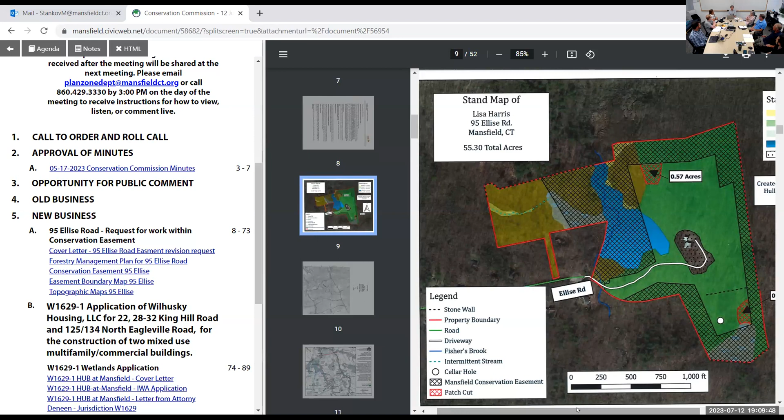And so I just want to be super clear that the easement is written in a way that explicitly allows this activity, because there are phrases in there which prohibit it. I'm all for the activity - it's the precedent on our conservation easements that I'm more concerned with. So I'm just going to pop out the easement in a new tab here.

The way the easement is written - now I'm not an attorney, but I have to preface that anytime I try to give any legal reading of anything - section 2 notes that the grantor covenants that without express written consent from the grantee, all of the following activities are prohibited, meaning no removal or destruction of trees of any kind or dead trees, no dumping, no topo changes, all of those things.

However, any request for written approval for uses and activities noted above shall be accompanied by a detailed statement of purpose and specific plans. And the grantee, the town, has the right to approve such changes in use, provided it is found they do not interfere with or have an adverse impact on the natural, scenic, ecological, and open space values being protected.

So you're absolutely right that there are laws that say you basically can't modify an easement in a way that would give someone a benefit if this provision doesn't exist, but fortunately this one was written with that language.

And so that written approval, as you said, just to confirm, is coming from Planning and Zoning? I believe it has to come from the town council. Some easements are written so that Planning and Zoning is the delegated authority, but I haven't found one here. I actually have a meeting with the town attorney tomorrow, and that's on my agenda - whether it's part of the delegated powers of PZC - but I think it has to be the town council.

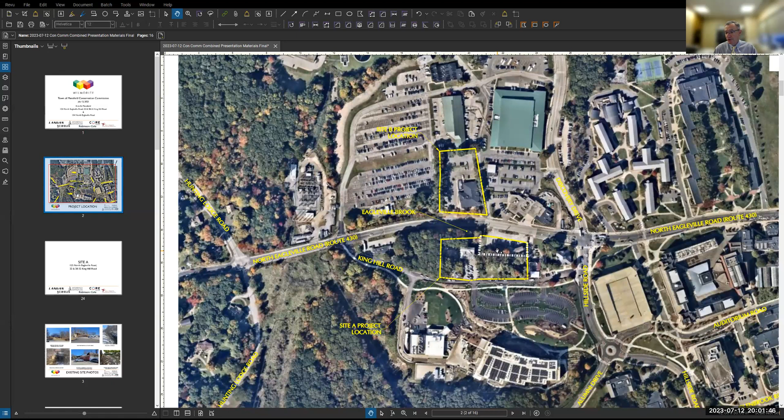With that, I'll pause and say that our presentation this evening will include a few slides. Tim Underko is going to run the presentation. He'll give you an overview of this revised project and some of the key details that relate to the regulated areas on the property. There are no wetlands or watercourses on the property. There is some off-site activity which brings the upland review area on the project site into question, and we'll look at that. Then Dean Gustafson will review the resources primarily associated with Eagleville Brook and describe some of the mitigation plans we've developed for the project.

Great, thanks, Tom. Michael, you did see Tim O'Neill on the Zoom earlier. He is attempting to fly out of Chicago, but a tornado has touched down in Chicago. So they are sheltering in the basement of O'Hare Airport as the tornado moves through the city. He sent me a message that he had to drop off, but he was going to try and listen in. So he's dealing with some things right now.

So I'll take the slides from him on this one. But Tim did present in January. I think Tom did a great job of highlighting some of the differences that we'll run through. Again, my name is Tim Underko, professional engineer and a principal with Langan, with our offices in New Haven.

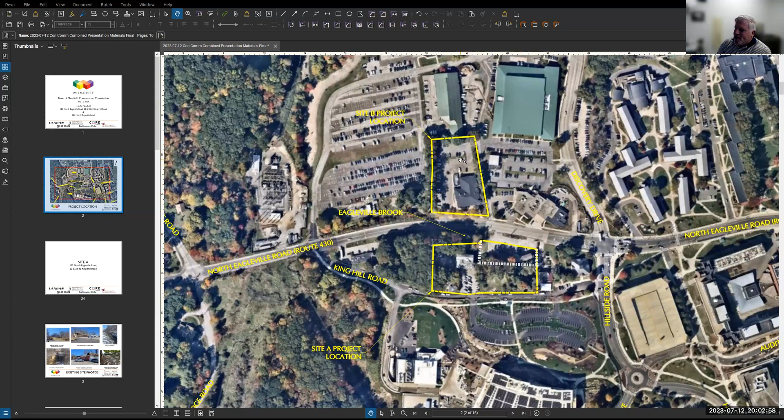So we're going to split the slides up into two divisions here. Site A is the site south of North Eagleville between King Hill Road, and includes the new parcel here that is the Sam's Food and Subway. And then site B is the current location of Huskies on the north side of North Eagleville Road. I'm going to try and go quickly through most of site A since we've talked about a lot of this previously.

Some site photos, so you can see the existing buildings that occupy the site. And then really the most important resource is the section of Eagleville Brook that's on the north side of the property, off of the private land located within the North Eagleville right-of-way, call it the state of Connecticut / UConn ownership. Here is the existing culverts that we spent some time discussing in January, where the previous application included an extension of these culverts so that there was the ability for the driveway to cross over from the property out to North Eagleville.

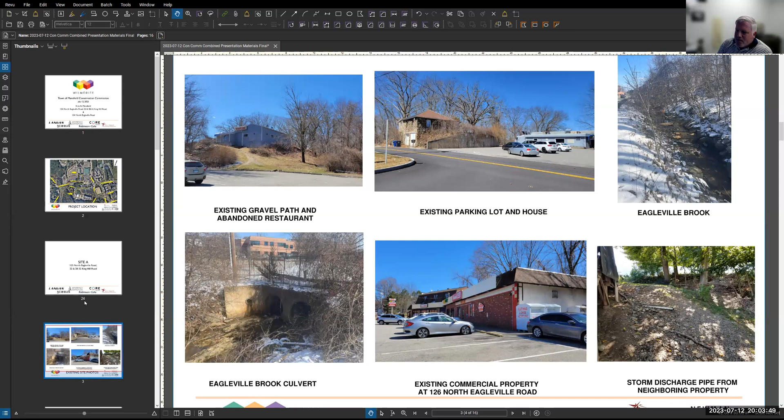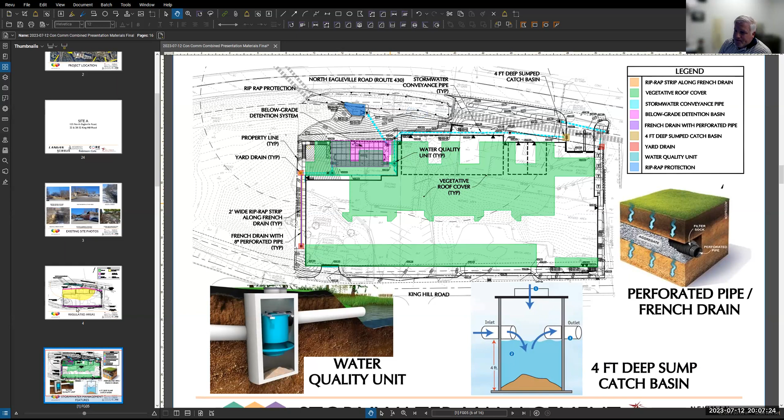I think that might be a good spot. Dean, anything you'd want to add from either a resource standpoint or from the enhancement to this area? Actually, before you start—

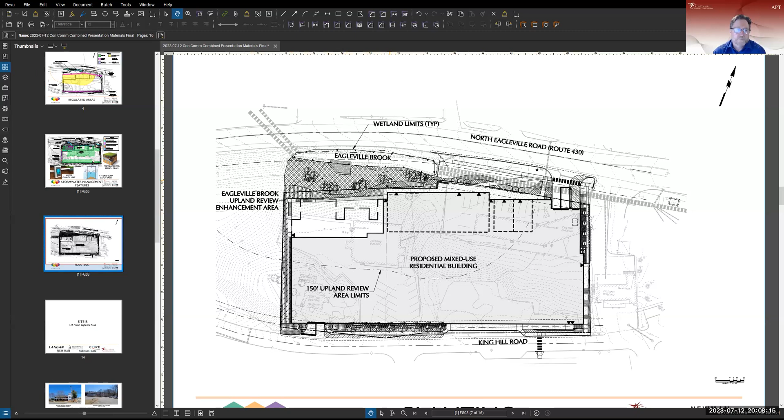Tom mentioned it but didn't show it. In the January application, if you recall, the driveway for the project was generally in this area here, and doing so required us to extend the culverts to shorten the length of the open water stretch of Eagleville Brook. With the addition of the Sam's Food and Subway parcel, we're able to move that driveway all the way to the eastern end and not have that direct impact to the brook itself. We don't need to modify the existing head wall or the existing culvert. So I thought that was worth mentioning—I know Tom brought it up, but wanted to highlight it with the graphic.

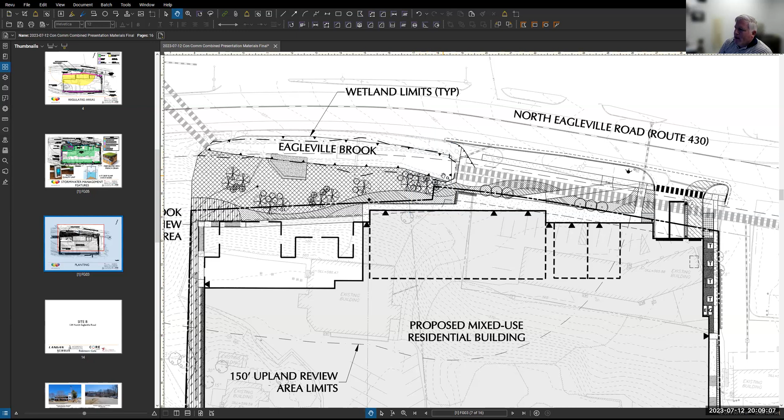Dean, go ahead. Thanks, Tim. Good evening, folks. Dean Gustafson, Senior Wetland Scientist, Professional Soil Scientist, All-Points Technology, Waterford, Connecticut.

Just a quick description on this section of Eagleville Brook: it's a heavily incised stream, a couple hundred linear feet of open channel. The banks and some of the stream bottom are armored with stone and concrete. There's a spillway structure about midstream, which is a concrete weir structure. UConn has a sampling and monitoring station just upstream of that point. There's generally very limited, if any, bordering vegetated wetlands to the brook. Essentially the jurisdictional boundary is the ordinary high water mark of that stream system.

The project will have a couple hundred square feet of impact to the southern bank of the brook for the controlled outlet of the stormwater discharge. As Tim noted earlier, there's a high level of renovation of stormwater from this proposed project, but we still need to provide an area for discharge back into the brook. That's been designed properly to alleviate any energy or erosion issues, in addition to refining the water quality treatment.

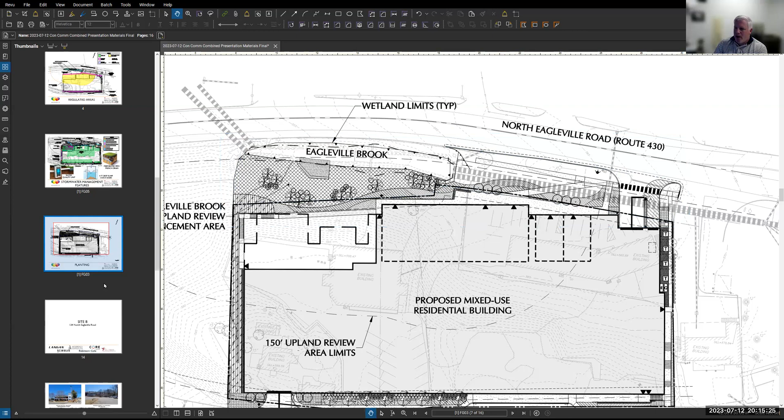So if we jump across the street to site B.

Well, we do have comments, but I don't know how everyone would like to go through them. My comments are very technical stormwater ones, which I'm happy to go through, but whatever you guys like to do. Rick is at another Zoom meeting tonight, but I can text him and have him jump in if we have wetland comments. Why don't we let the applicant finish, and then we can get to your comments - are those on site A? On both A and B sites.

Okay, sorry for that - we're trying to figure out when the peer reviewer would have. Yeah, no, that's great, didn't know you're in the room. Hard to see who's sitting around the table on Zoom. So that's great, yeah, I agree. I think most of the comments are technical. Not sure - I certainly don't have all the numbers in front of me to answer specific questions, but if you wanted to give a recap to the group, that'd be fine for me.

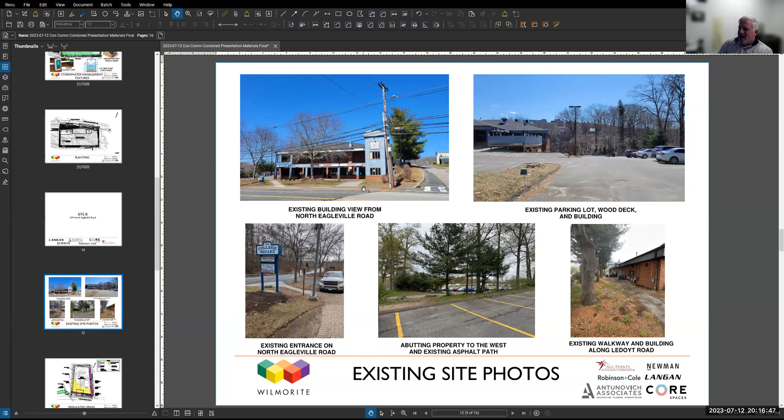So yeah, I'll try to run through site B similar to site A, prepared similar slides. I'll let Dean give a couple seconds on what happens on the north side of North Eagleville. Again, some site photos just for orientation - the site is essentially fully developed today with existing building and parking. When we look at the resource in this case, as the culverts cross north, flow is heading from east to west, then north, then west again.

As the culverts come under North Eagleville Road, they daylight again, and we now have an open air channel section of Eagleville Brook. That's located completely off of the private land, but the 150-foot upland review area, the yellow hatch, does encompass a portion of the property. Our purple hatch across the eastern and southern side is the maximum building setback, required in the zone to have the building close to both property lines to address the surrounding roadways.

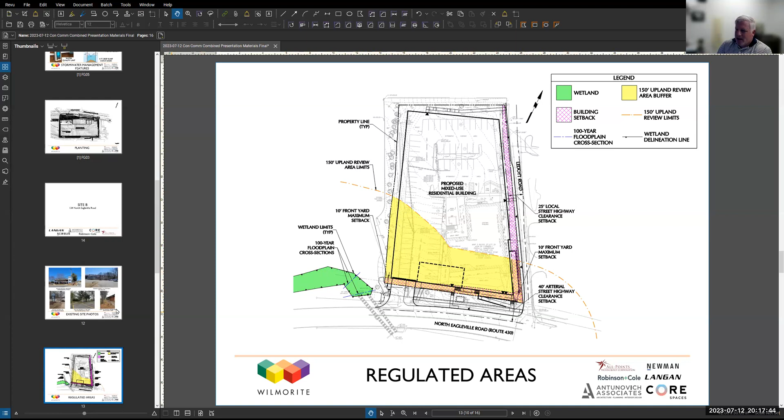We get into a similar graphic on what we're doing from a stormwater management standpoint. Again, a significant portion of vegetated roof, a below ground detention system to provide attenuation to help slow those peak flows, water quality units, some catch basins, a rain garden across the front taking some of the walkway areas, and just trying to do everything we can within the remainder of the site outside of the building footprint.

Today, the existing roof and existing parking is a direct pipe network. There is no attenuation, there is no quality improvement. All of the flow off the property heads to the south and west into the brook. So we think we're making significant strides from a water quality standpoint and a quantity standpoint with the proposed improvements over the existing condition.

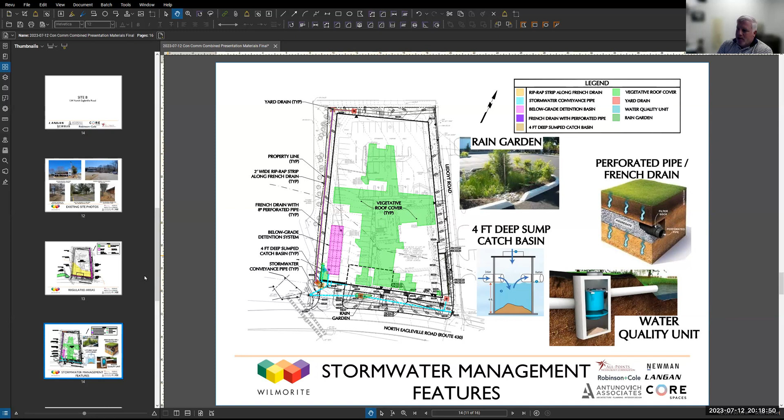Again, a landscape plan that rings the outside of the building anywhere we have disturbance that isn't building or pedestrian walkway—new trees, new shrubs, and new ground cover. So a tight site here, looking to redevelop the existing developed footprint and provide improvements where we can on all sides.

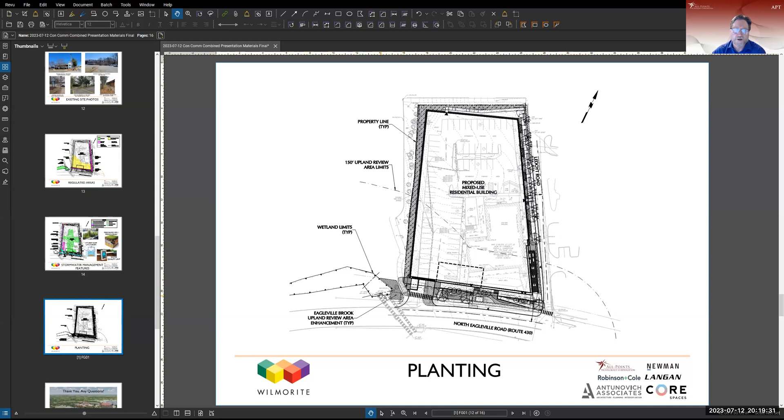Dean, anything to add on the open air section of the brook just off the south and west of us? Yeah, sure. So this section of Eagleville Brook, the outfall from these culverts underneath North Eagleville Road, there's a significant elevation change from the inverts of those pipes to the actual elevation of the stream. Those pipes discharge onto a fairly large concrete splash pad, then drop down into the actual stream bottom elevation, so this culvert impedes any type of fish passage further to the east.

It is also that section with that quick turn to the west in the stream segment—especially that northern bank of the stream—that is heavily armored with stone. There's really no bordering vegetated wetlands within this delineated stream segment. There's an existing stormwater outfall from the existing facility that'll be used for the improved stormwater management system. There's no need for an upgrade to that head wall, so there's no direct impacts to Eagleville Brook for Site B.

We are proposing some upland review area enhancements in this area. There really isn't any significant invasives, woody invasives particularly—that area looked like it was landscaped somewhat recently, within the past 3-4 years maybe, by UConn. There are some native trees and shrubs in there, so we'll enhance that program, provide a bit better diversity and density of native species to try to improve the buffer between the proposed development and the head wall for Eagleville Brook.

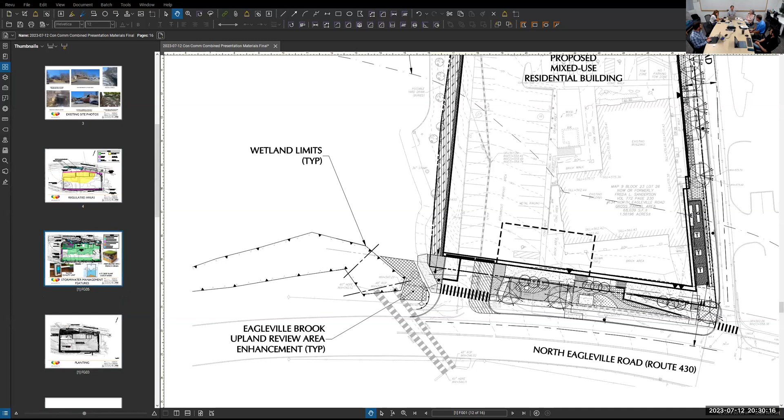The state will review that, but for the stormwater final outflow, there is a structure on site which is partially within the wetland boundary for Eagleville Brook. I think that's really under the state's review.

But could you maybe just explain what that blue is and why? Sure, so the need for this is really a function of the existing construction of the channel. There is, if you recall, Dean mentioned the fact that there's a weir structure across the brook that UConn uses for monitoring.

What that does is it actually backs up, it artificially raises the water elevation behind it heading to the culvert. Because of the location of our site, the elevations, and the need to connect to the road, that rise in water was actually causing some negative effects back into our stormwater management system.

During larger storm events, that flow could actually work its way backwards. This was something we worked with CHA during the first application. We actually needed to discharge our water on the downstream side of that weir so that we were at a lower water surface elevation to keep that water from backing up into our system.

So that's why you see an outfall here, as opposed to, say, trying to drill into the side of the existing culvert and eliminate this disturbance completely. We really needed to move the water far enough downhill so that we weren't getting negative effects from the weir that crosses the brook today.

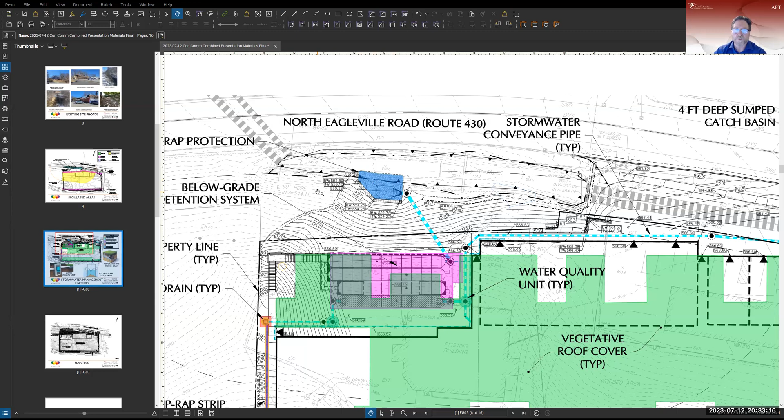That's existing stone armoring, so we're really not changing existing conditions. We're just making sure we're providing appropriately sized riprap to allow for appropriate dissipation of that flow. So we're still accounting for that as a direct, or minor direct, impact, but it really doesn't change existing conditions of the stream bank.

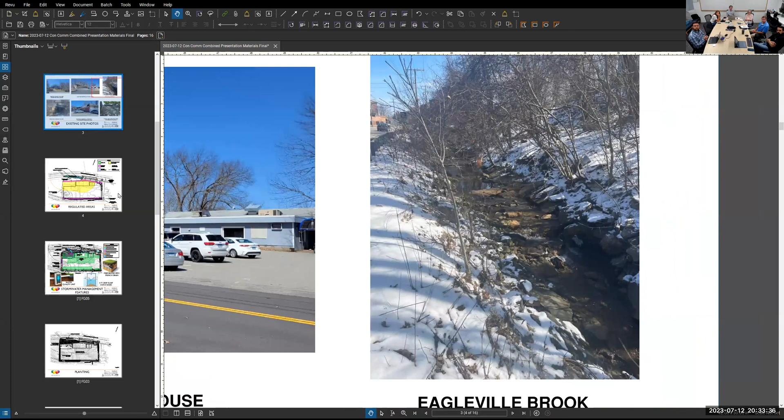Is the stormwater system designed to handle a certain sized event, like a 5-year storm, 10-year storm? I believe the modeling goes to the 100-year. To keep the stormwater on site? Just to be able to manage and meet the TMDL requirements. The water is discharged off-site, but we're trying to do it at a controlled rate.

There's no infiltration on site? You're in an area where, because of the brook, groundwater is high. If you've walked out there, there are rock outcrops and exposed ledge, so this isn't a sandy field where we're really able to push the water down. We're limited by the geology out there, so the idea is we collect the water and try to slow its discharge to meet that TMDL requirement.

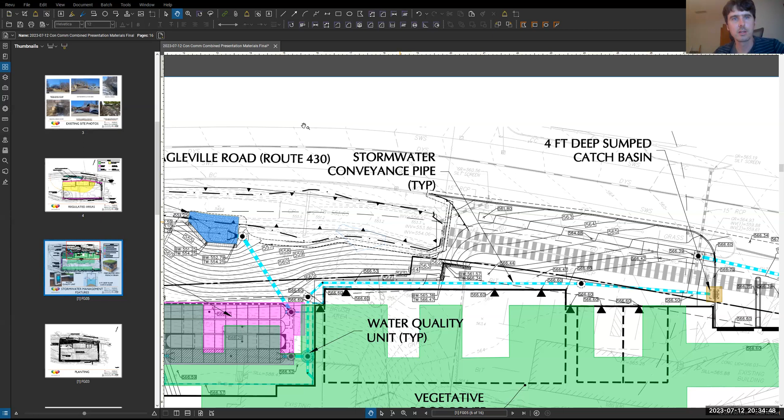I have a quick clarifying question. You guys hear me? Yes. So the modeling was done up to a 100-year storm, but that doesn't mean the storm system was actually conveying that, right? The pipes might have been at capacity at that 100-year storm, and I think you're using HydroCAD, which just presumes it disappears past the pipe if there isn't capacity. Were you looking at capacity?

What we typically do is the 100-year model assumes that in a storm that large, if we have a 100-year storm, you're going to be riding your kayak down North Eagleville Road.

What we're trying to prove is that in a storm of that level, our systems, specifically the detention system, are able to still manage flows. So we don't have a system that says, okay, in the 2-year storm or the 5-year storm we are less than existing, but you get to the 10-year storm and now we're 200% of existing. We're able to keep that reduction on a global scale from the site. All understood that completely.

100%, like that's the runoff from the site. But I think the question that was asked is, can the pipes leaving the site handle the runoff? Up to what point? I would have to check the analysis.

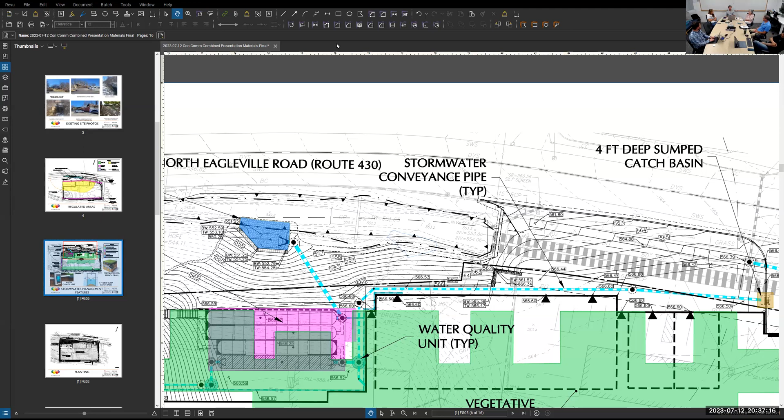The only other thing I wanted to ask about is infiltration. It seems like this is an area for build out pretty much for dense development. And the site does have ledge and shallow groundwater, but it seems like sites A and B really do not have any subsurface conditions that would allow for an infiltration practice. I'm asking either you, Chuck, or the applicant, because we all know that the TMDL is because of the impervious cover in Eagleville Brook watershed. So that's the driver for the TMDL. I'm just wondering if there's another prudent alternative, because just building out these properties puts pulses of stormwater directly into the brook without any kind of treatment. I mean, we have the hydrodynamic separators, but nothing else beyond that.

I'll put it to the applicant first if you have any. Sure. Yeah, on site A we do have a French drain trying to collect some water with a perforated pipe. There's certainly the ability for that water to go into the ground. This entire site has ledge below it, so even if we infiltrate, it's going to hit the ledge. It's going to continue along the hydraulic gradient to the brook. So you may be hiding it, but it's still there, running across the surface of the rock.

We think that the addition of the green roof in this round of the application really kind of moves the needle from where we were in the prior application. Obviously, we still have some architectural and structural details to work through on what that system is. But we think for a site today, with both sites essentially very nearly fully developed, we're trying to make it better with the addition of the green roof, with the treatment, and the fact that there is a detention system to attenuate flows and try and knock those peaks down. Chuck, anything to add? We're trying to do everything we can here, but certainly we are limited by the geology.

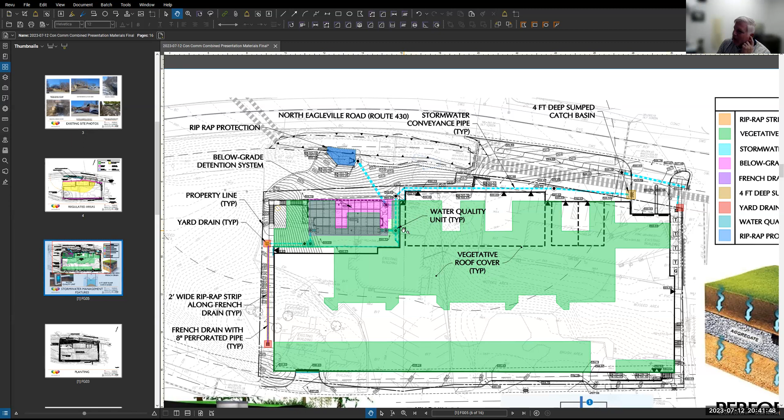That kind of dovetails back to the site constraints. In this zone, we have to have building across both frontages, and where we have that frontage, we've got to be close to the street, so we don't have an open pocket for an infiltration system. We're going to find ourselves back to the rock and groundwater scenario, but this zoning really is pushing for density and proximity to the front and rear lot line.

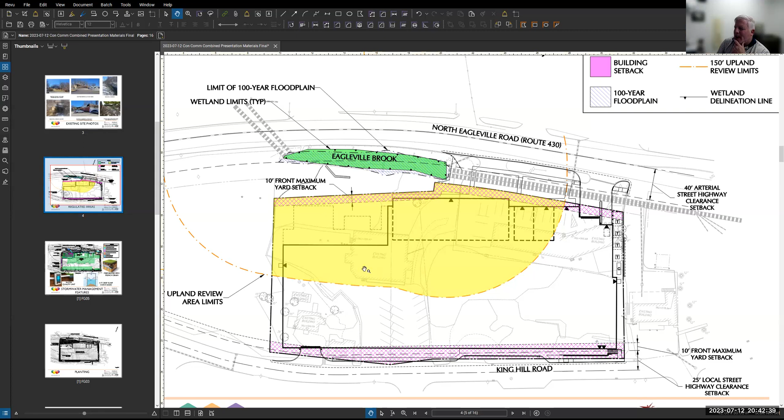But we understand the question and the desire to do as much as we can, and we're hoping we're getting there. Do the side lot lines have the same maximum setback? I don't know if they have the same maximum, so there potentially could be. I think it's a pretty difficult site, but your side setback could maybe adjust your building footprint, though I think it's still a difficult site either way.

Anybody else have questions? Oh sorry, go ahead, Chuck. Rick Canavan just joined. He's our wetland scientist, our wetland reviewer.

If you have any wetland questions. Hi, Rick, how are you? Hi, apologies for being late, coming from another meeting, unfortunately. Yeah, no, I get it.

Do you have anything? We've talked a little bit in general about your notes, but is there anything you want to stress or focus on? A lot of my comments were kind of setting the record straight on some things that weren't necessarily technical questions or design concerns, but things I wasn't particularly concerned about, just wanted to make sure they were on the record for this application. I'm not sure if you talked about making sure the quantities of impacts on and off, on the town-reviewed parcel and on the state parcel, are accurately presented. Like the view you have up now, I'm seeing the discharge point to the brook. I'm not sure if you talked about that at all.

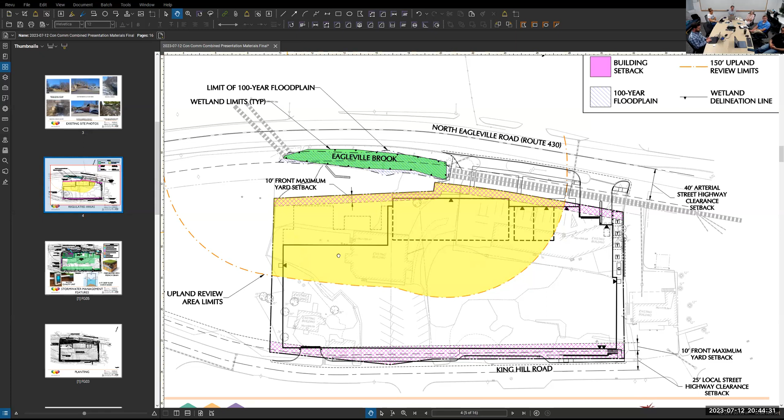Could you talk to your assessment of that? I guess I had a question for the applicant about the grading through the bank of the channel, and it would be helpful to hear how they plan on building that. My bigger concern is the construction period process, how you're going to get equipment in there. Secondary question, the area is going to be planted heavily, which is awesome, but just making sure there's not a maintenance issue with needing to get something back into there in the future. That was one of my comments, some to the extent of how water handling is going to happen in that space.

Was that a comment or an actual question? It was a question to the applicant - there's construction proposed through the bank line of the stream, but the plans, as far as I could see, showed no water handling or stormwater management at the limit of grading, inland of it, upgradient of the limit of work. So just curious how that area is going to get constructed and how work is going to stay out of the water.

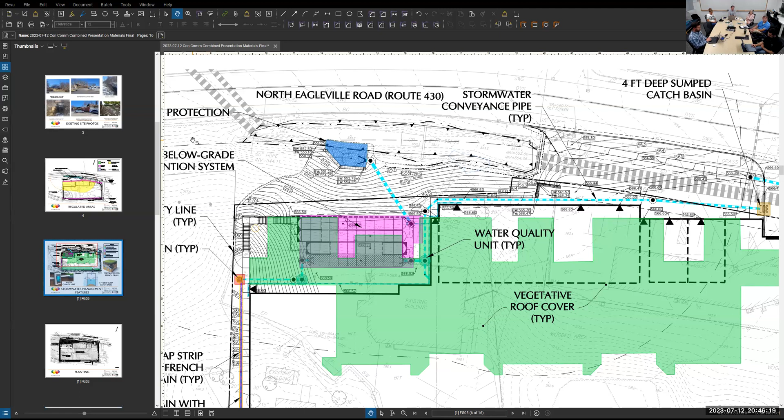Tim, can we put that to you? You have a response? Yeah, I don't know if I have a coherent answer, I'm sure we need to talk it through with the construction team. My vision would be that this would be work from the top side, working back. I know we had spent some time on the first application on how you extend the culvert, and whether you're in the water, in the street, or on the right of way. My vision for this would be that you're up on the slope, above the outfall, and working your way back.

Certainly, if there's a need for additional detail on the sequencing of that, or what this treatment needs - does it need erosion control matting, does it need something special to make sure it gets established - we can take a look at that, but don't have a great answer on construction sequencing. We'd have to talk through with the construction team on what their vision was, but from my seat, it would be working from the south, reaching down, pulling yourself back up and away from the watercourse. With that interface of re-armoring that bank for the spillway from the discharge, there'll be a need for some type of cofferdam or sandbag barrier to separate the stream flow from the work zone. So we can work with Langan and the construction team on providing details for that sequencing.

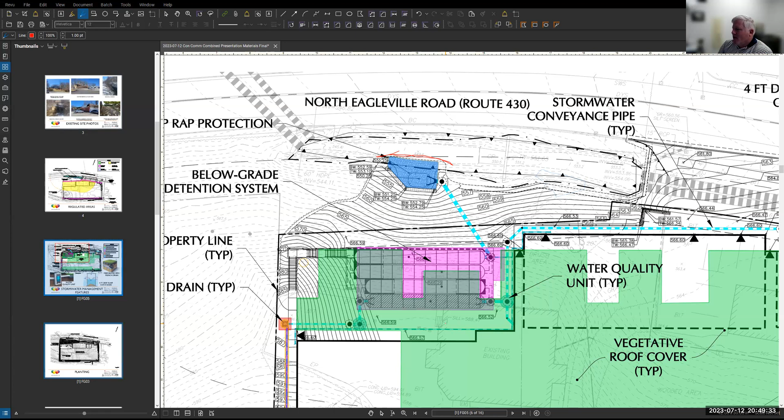So that would be for the pipe network itself - that was the answer to the question from before. So pipe network for 10-year, the system itself for 100. What we typically want to happen is, if we have a storm that exceeds the capacity of the pipe network or the inlets, you don't want the water into the building. You want to make sure there's the ability for it to get away from the building, either into the roadway network or overland, over various reinforced areas or treatment areas that would be installed as part of the construction.

But just because the system - when you say it's 100-year, that's the underground detention system is 100-year, but the pipe... so the best way I try to describe it is: the underground detention system is built to take hurricanes. The pipes and catch basins take thunderstorms. The detention system handles large quantities of water over a 24-hour period. The pipes and catch basins are for that flashy, fast-coming water, usually in a much shallower depth but happening very, very fast. So they're two different kinds of analysis in the stormwater systems.

So the 10-year is looking at that thunderstorm flash - what happens, can water get into a catch basin, and can water move through a pipe. The detention system and that conveyance is: okay, it's going to rain for the next 24 hours and we're going to have 7.5 inches of rain - can this system intake that water, process it, and discharge it, as opposed to being overwhelmed from that large depth of rain?

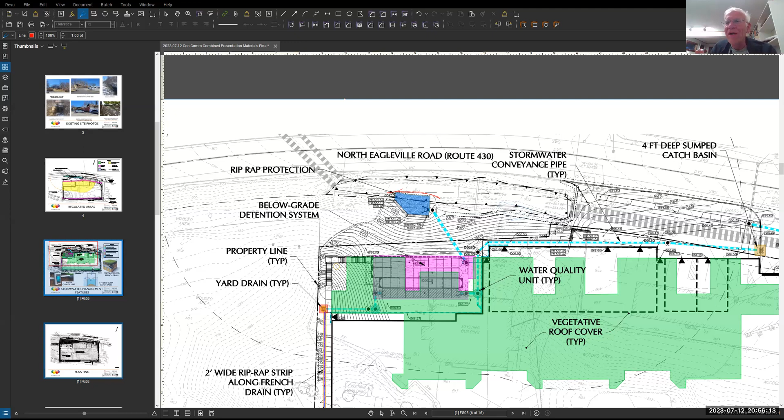A couple of questions. I just wanted to follow up. I guess James mentioned rain gardens. Are there rain gardens here? I mean, they can be done and they can be rather effective and they can be fairly close to buildings, but it looks like the slope is maybe too big for effective rain gardens here.

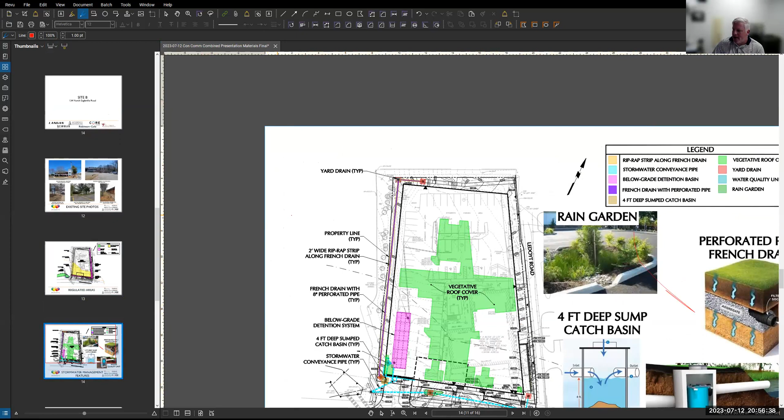Is that right? Yeah, let me find the right slide. We've got one proposed on site B, out in kind of the gap between the building face and the curb line. So there is a rain garden on site B. There is not a rain garden on site A.

As you know, rain gardens can be quite effective, and the area has sort of been a leader in the field here in terms of integrating rain gardens with green roofs in an urban setting. But there's going to be slope constraints on this, so I'm glad to see that that's there.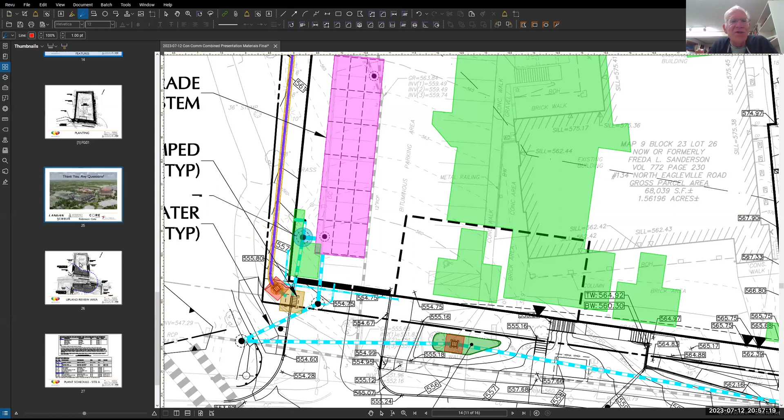The second question is, what's the plan for the steep slope on the north side of site A there? I guess we had that on a picture earlier here, and I guess that's where there's going to be riprap and discharge. I'm wondering, that slope is currently forested or mostly forested, and as a result of the construction here, is any of that going to be left intact, or is that going to all have to be revegetated?

Yes, that area will be revegetated as part of the work to get the discharge in. And I'm not sure off the top of my head, I could look.

A lot of the work would also come from the enhancement to remove invasives, right? That's also part of that slope work, includes that disturbance as well, correct? Yeah, that's correct. And there is maybe about a quarter or slightly less of the far western end of that area remaining untouched. In this graphic, you can see the proposed tree line.

So, I haven't actually had a chance to look at the landscaping plan here, but I would certainly not recommend this to be a lawn area, in keeping with the general recommendation near streams like Eagleville Brook, headwater streams, that it should be revegetated without lawn, and hopefully mostly forest, as it currently is. But I don't know, what is the landscaping plan here?

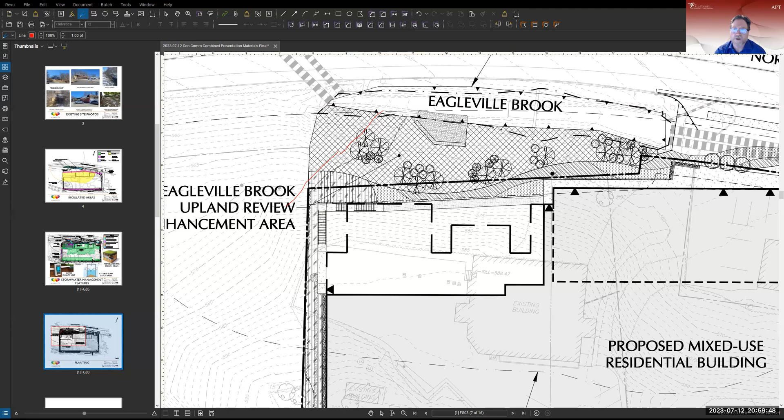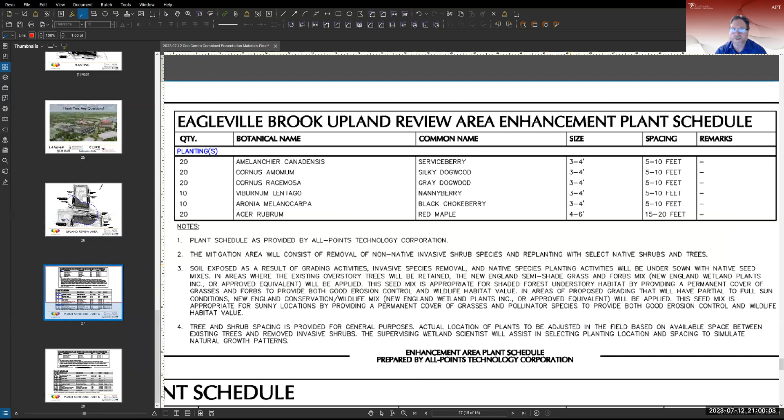Yeah, I'll just add one thing. We'll work on the graphical representation, but we're merging the landscape plan with the restoration plan. So from the landscaping palette, that's what we're showing on this graphic, but it doesn't necessarily represent the density of trees and shrubs that are being planted in that zone.

Yeah, Dean, here was the plant schedule. I don't know if you wanted to run through any of the species, but at the back of the set we do have a full planting plan, and we've worked with Dean on what would be in that enhancement zone from a plant species standpoint.

So this planting schedule represents the crosshatch, and in addition to that, what you're seeing graphically represented for trees and shrubs is associated with the landscaping plant schedule, and they both rely on native species suited for that locale.

This is for site A or site B or both? We have a schedule for both site A and site B. This is the schedule for site A. Are the species much different for B?

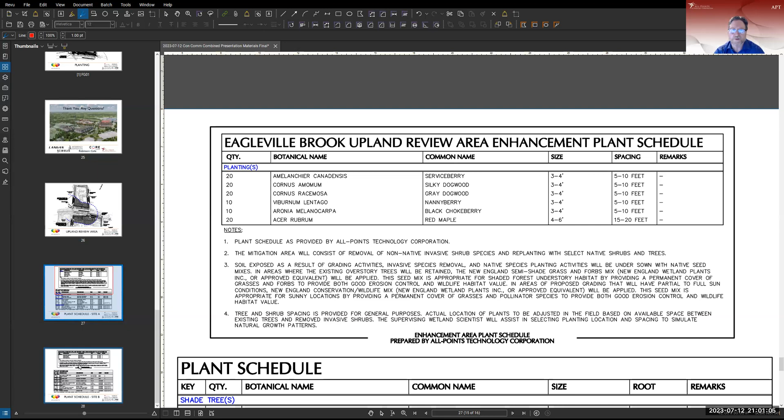Just slightly, B is a much smaller area, so the quantities are significantly reduced, and we've changed the species distribution just slightly. Yeah, this is B right now. Okay, thank you. You're welcome.

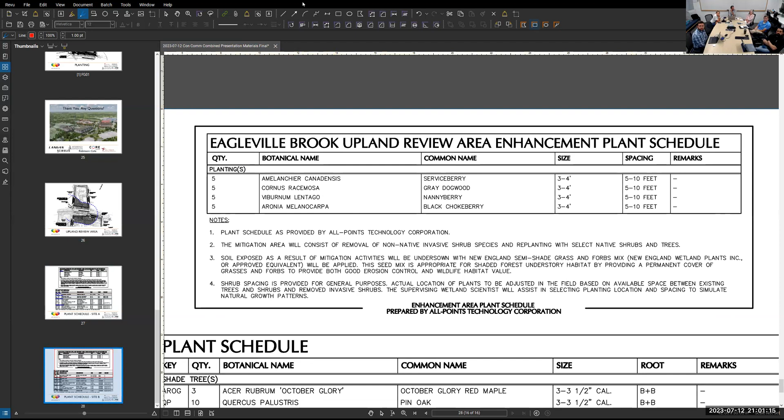Any other questions or comments from commissioners?

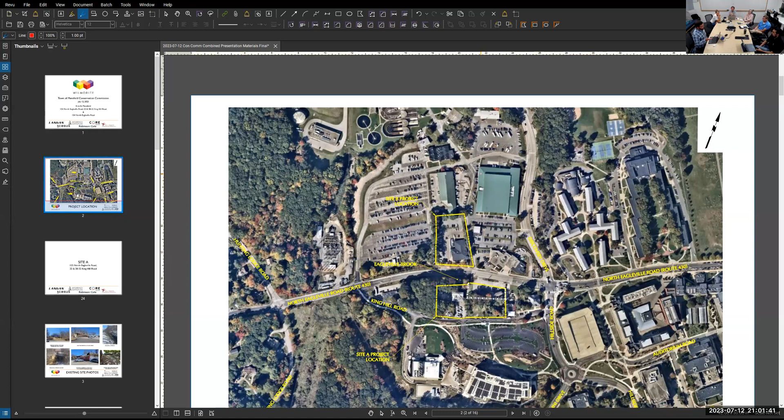Right, Chad, you're on. So a question I have for the commission is, in some of our more recent language, and with the addition of Mike to staff, we have introduced language about the town of Mansfield performance standards and the 25-foot, 50-foot, and 150-foot upland review areas. Part of this project was before the commission prior to our knowledge of that, so I'm wondering, should we include that language in this one or not?

So to catch you up, the zoning regulations are a magical document with many things hidden deep inside of them. One of the things deep in our performance standards is that there's a line that says, wherever feasible, there shall be a non-disturbed buffer of woody, natural vegetation within 50 feet of all wetlands and watercourses. That's been in our regulations for a while.

It's a pre-existing standard, but as part of attempting to institute a more universal riparian corridor buffer regulation, that's something I've pulled out and has been a focus lately. I think it's a pre-existing standard, and it's very reasonable to bring it to the attention of wetlands and planning and zoning to remind them that wherever feasible on these project sites, there should be a woody, natural buffer where appropriate.

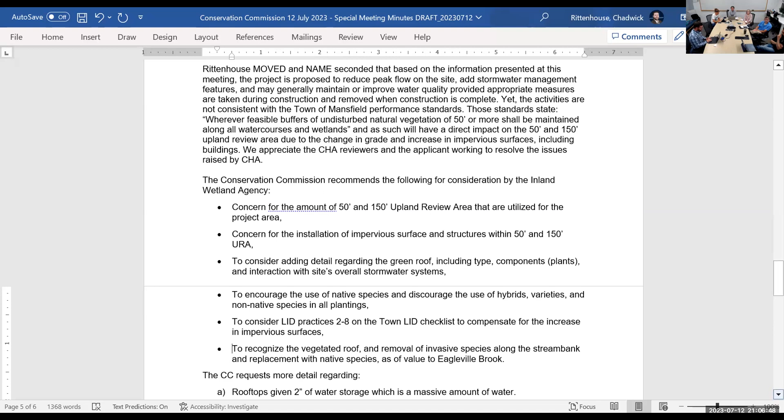It's always nice to say something positive, so we have a positive bullet recognizing the vegetative roof and removal of invasive species along the stream bank, replacement with natives as of value to Eagleville Brook. And then we had right at the end a flurry of activity requesting more detail.

And James, I would appreciate if you would give A, B, and C a look through and make sure I captured what you were saying.

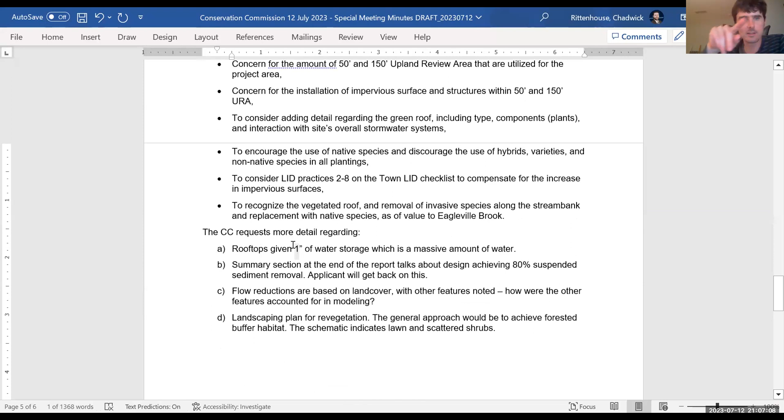Yeah, for A, it's really like 1.67, not 2, but I think that's okay. You just put like a squiggly 2. Some people... that's good. They're all good. Okay, and then John's landscape plan, I think that was John, about revegetation.

Two things, or 2.5 things that occur to me. One is that all peer reviewer comments are, in the IWA's eyes, adequately addressed by the applicant, or some version of that.

Up above, you mean in that preamble? No, I think our recommendations are that we've done in the past, that all peer review comments need to be adequately addressed, or that we're recommending permits are not issued until consensus is reached.

Or that the comments are resolved by one party or the other, something like that. I thought it would be in one of your recommendation bullets. You can make the first sentence here a bullet right above it, like that, with one of those magical backspace deals.

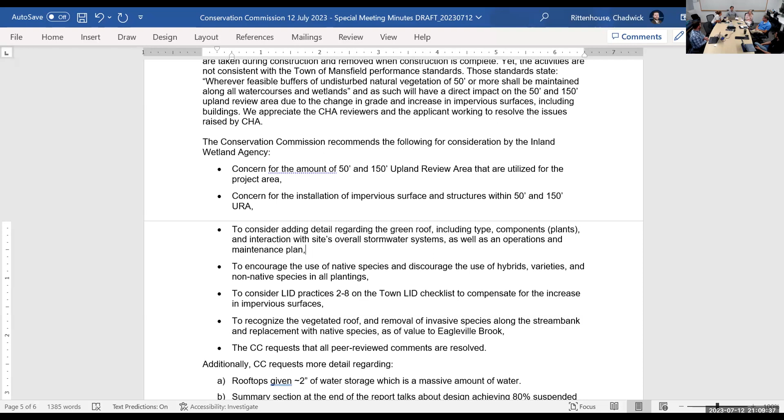And that makes me think of the hydrodynamic separators, which just seems to be a standard thing, that an O&M plan is provided for those. They did have that as part of their own plan. Or one of your comments is about the accessibility of a vac truck in order to be able to clean them, so that'll be addressed as part of the other comments that have been made.

Anything else? I think you did a good job, Chad, great catching everything. We need to take Chad out one night. I think this is the longest one we've done. Yes, they are getting a little bit longer. Projects are more complicated, so I would agree with that as well.

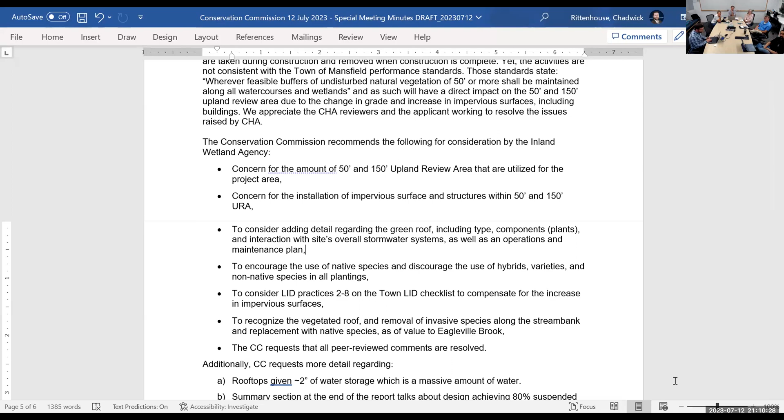Okay, so it doesn't all fit on the screen unless I make it tiny. There it is.

Does my name need to be in there? Are you making the motion? Typically when I do this, I'm okay putting my name up as I'm moving. Looking for a second. We have a second? Okay, any further comments from commissioners on this motion?

Ready to vote? All those in favor, say aye, or raise your hand if you're remote. Aye. Anybody opposed? Any abstentions? Motion passes unanimously. I'll stop sharing.

Thank you very much, everybody. I know you've been here once already and you'll be back again, so not to us but to somebody else. Thank you for the clear presentation, I appreciate it, and for all your time and effort on this. We appreciate your input. Have a good night, good night. Thanks all, great, thanks folks. You too, thank you, Rick. Good evening. Thank you, Chuck, yeah, thank you very much. You're welcome.

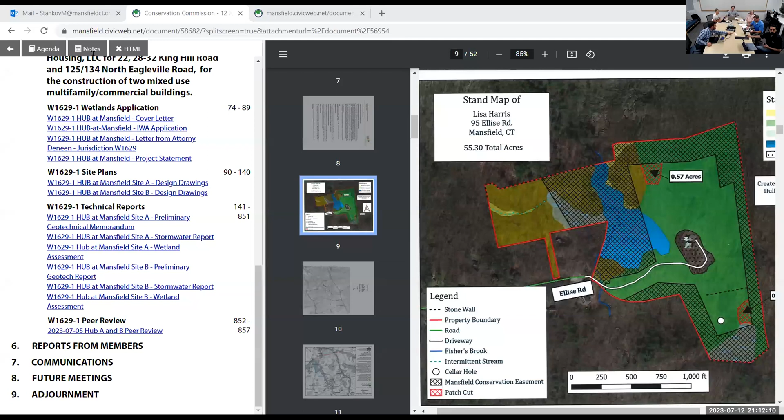Wetlands approvals have been slow. In terms of what I've actually been doing for wetlands, I've been examining a lot of the zoning permits and checking to see if they need wetlands review, a lot of stuff outside the wetlands review area. The last actual wetlands approval I issued was, I think, June 5th.

The most recent thing people will be interested to learn about is on 619 Mansfield City Road. There are two large former farm ponds right before you get to the White Oak apartments, about 2 minutes down the road to the south. A limited permit was given for some maintenance around those ponds. There was at one point a pipe that had a beaver dam built up over it, so that was removed with a little bit of excavation as part of routine maintenance of existing structures. Now there's some proposed mowing of the area around the pond, but no direct pond impacts. There's also going to be a house built on the property, about 100 feet from the edge of the wetlands.

So it's taking an area that has previously been very wild and unmanaged and making it a bit more of a managed wetland. But in my opinion, it's not really going to be a detriment to the wetland itself. We're not seeing any direct impacts on the flow of water in or out, and not much impact on the actual banks, so I'm not overly concerned. I'm hoping some of the improvements they're intending to make will be good for wildlife - they're not removing all the dead trees in the area, which are useful as woodpecker habitat, things like that. So it's hopefully going to remain a thriving little pond ecosystem. That's the fun one, other than that it's been permitting.

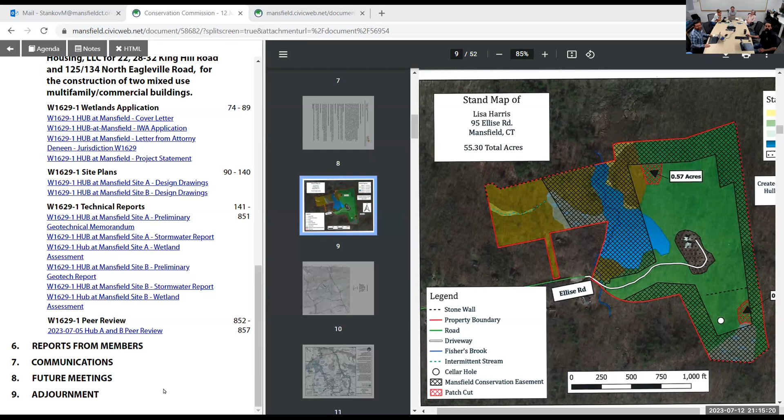The one thing I wanted to share was that I attended the Water System Advisory Committee, which is the group that's part of any new interconnections to the water line that comes down from Connecticut Water to UConn - right, it's what Quinn used to go to. I meant to send you the agenda and a follow-up email from that conversation, just to inform everybody. I think I'll send it for the next meeting's packet. There was a question about an interconnection and whether it was considered an interconnection or an extension of the main line, which is technically not described in the MOA or the MOU between UConn and Connecticut Water.

So there was a lot of conversation about the legality of extending the water line up to that proposed development near the golf course area, next to you. If they continue the stub, it could be construed as a new line as opposed to just an interconnection. So I'll pass that along.

Interesting. We've had a couple people right at the edge of the water pipeline zone, because we have the water pipeline overlay zone in town. There was a property owner interested in potentially seeing a development come in, but it's right outside the zone, and that's caused a dispute between the potential developer and the property owner over whether it can go through, even to get water for the development. That's very early in the process, and it may kill the whole thing in the cradle.